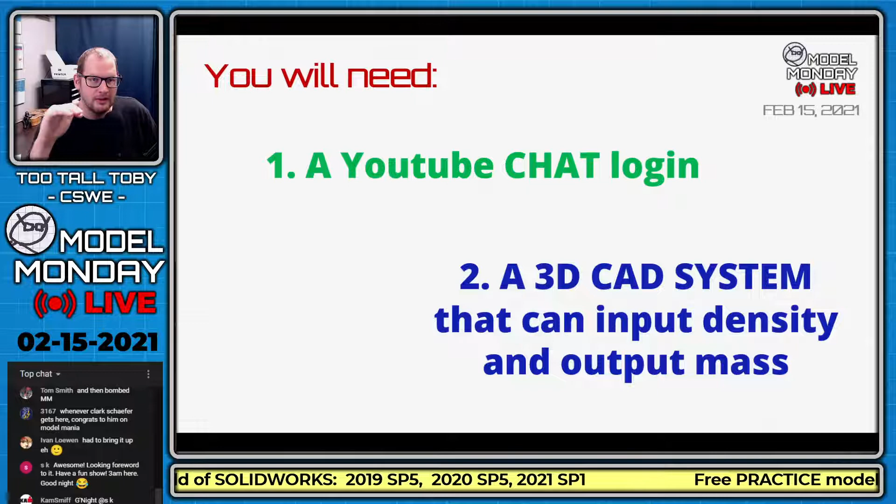Now, there's been a number of people asking about X-Design, Dassault Systems 3D Experience X-Design. Can I use X-Design for this? What I'm going to do to help with that is make a change on the next episode, where I'll change the materials to ones that are in X-Design out of the box. I'll make sure everybody has a proper heads up so you can all adjust your materials to suit. Just a little heads up, look forward to that for next episode. I'm going to change the material attributes, the densities, so they match up with some of the ones in X-Design, because it can be a little tricky to change out the materials in X-Design. I've had a number of people asking if they can compete using X-Design.

Absolutely. You can compete in any system where you can customize the density of your material and output mass. So anything you got, whatever you have. I have SolidWorks, I love SolidWorks, that's my jam. But if you've got something else, that's fine. I want to see who's fastest.

The rules of this tournament and the qualifiers are simple. Number 1, this is meant to be fun and good-spirited. There's not a huge prize or anything like that, it's just meant to be fun and good-spirited. Number 2, I will and have made a mistake on some of the prints, and I'm sure I'll make one again in the future. When that happens, we're just going to work through it together. If you're the type of person who gets really bent out of shape when that happens, it's probably best if you just hang back and watch. But if you're good with this, if this is your type of tournament, your type of challenge, then those are the only 2 rules, and you're in the right place. You're going to get along just great with everybody else in here.

Alnis asks a great question in the chat: does X-Design have custom materials? The answer is yes, 3D Experience is a fully connected system. All the apps are always talking to each other, and you can create your custom materials in a different app and then use them throughout your 3D Experience. So if you're doing simulation, X-Design, X-Shape, whatever you're doing, you can pull from that one single unified materials library. It's not really clearly taught in the X-Design training, so I figured it'd be better to make it a little easier for people, just because it's such a new program, if they want to use it.

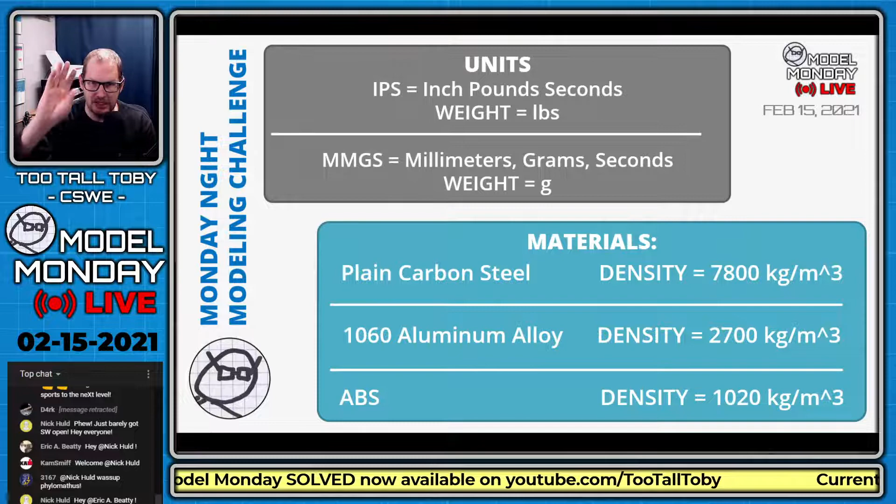For all those of you who have been here before, these are the same materials we've been using all year. No change yet. That change is coming on the next episode. Shaking things up here in Season 3. All right guys, here we go.

First challenge is ready to appear. This one is called 21-02-04 Lifter. I'm just going to flip over to full screen here so that everybody can see it in 3, 2, 1. Take a look here.

This is the lifter. This is something that you might find bolted to a piece of maybe angle iron or some type of iron that's got like a 30-degree angle coming off of it.

So I hope you guys have a chance to see this. Now if you're here for the first time, the challenge is now live. First person to get this answer correct in the chat wins. Probably the best strategy is to take a screenshot of this, a screen grab, using snipping tool or Snagit or whatever your screen grab software is. Take a screen grab of this and put it on a second monitor so you can design on one monitor and keep watching on the other, because I'm not going to leave this up on the screen.

So let's see here. Christian Tello already in with an answer: 124.6. Wow, that's amazing. Christian, that was so fast.

Unfortunately, you're a little bit outside of spec. That's not the correct answer. Maybe you want to check your material densities. But that was a great attempt there, very nicely done. And welcome, first time I've seen you here in the chat, so welcome.

Nicely done. I'm going to leave this up here for about 5 more seconds, and once this is gone, it'll just be up to you. So just make sure you've got a screen grab of this. I'm just going to take a quick listen to the audio here.

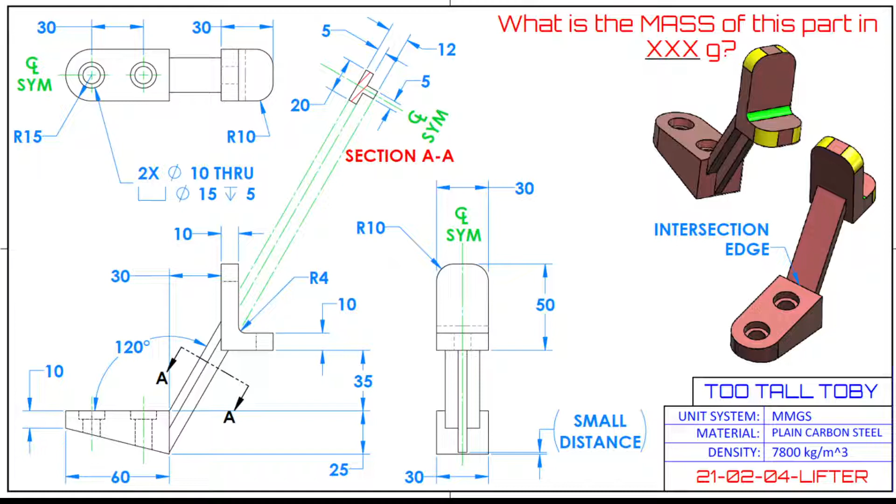Christian says, no, I'm just spitballing. Hey man, I love it. It's funny that you're doing that because I'm gonna flip back, I'm gonna take us off the screen now.

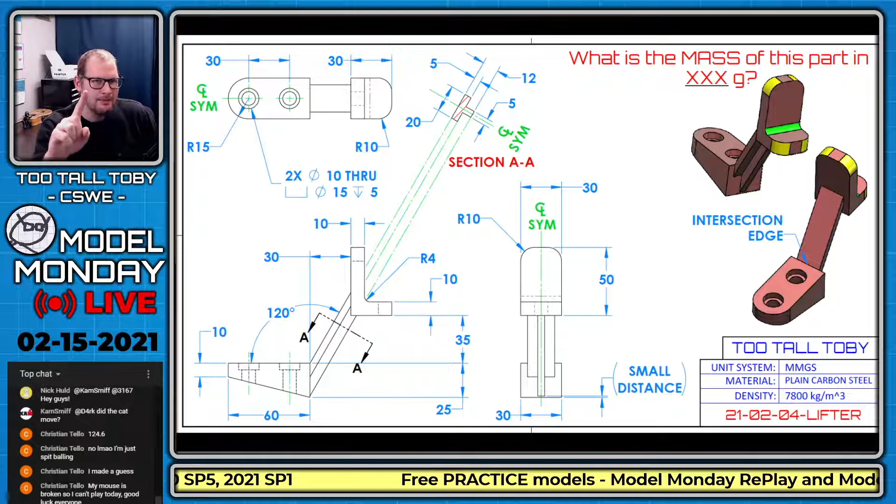In the tournaments that we've had so far, Christian, we have had a rule where you can answer incorrectly once. You get 1 mulligan per challenge. In the tournaments, we have people actually competing head to head, sharing their screens. So let's say, for example, Kam was going up against Zachary, and Zachary answered twice incorrectly. The first time he answers incorrectly, I'll let him know. Second time, that's it, he can't answer anymore, and it's up to Kam to come up with the correct answer.

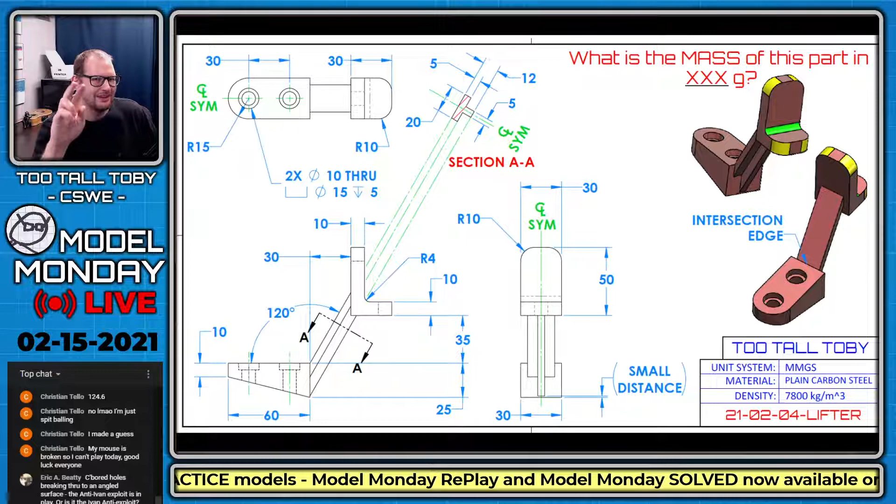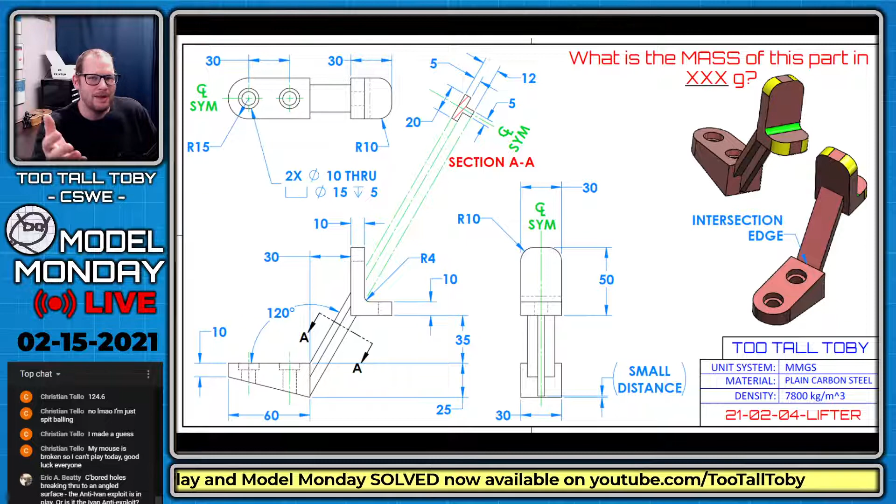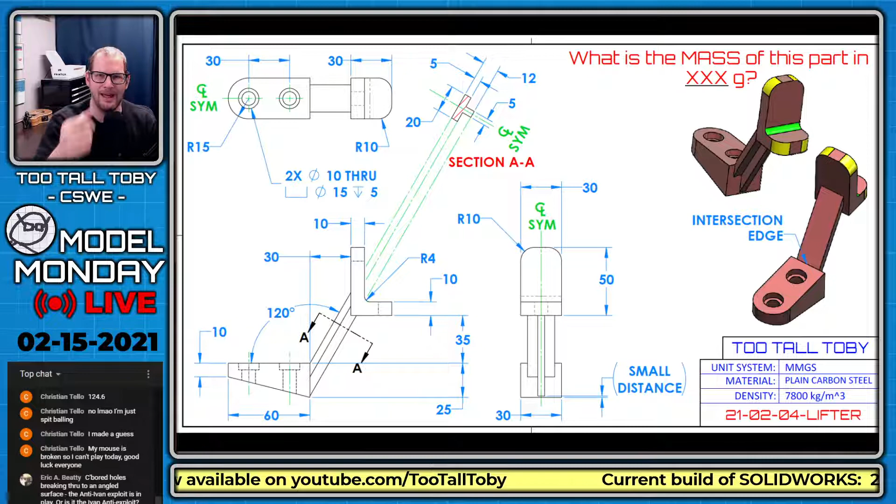For example, an example of game theory strategy, game theory optimal, might be if the part seems like it's got a lot of trickery to it, maybe just hang back and let your opponent tap out, as it were. I'm not sure I want to go quite down that far. This isn't meant to be that type of strategy, we're not trying to go that deep into it. It's meant to be good-spirited, and that might take away from that good-spirited aspect, but just kind of food for thought.

I appreciate the enthusiasm there, Christian. Christian also says his mouse is broken, so he can't play today. He's just kind of doing it by eye, eyeballing it up and saying, you know what, I think based on what I think the volume of this part is, it's probably 124.6.

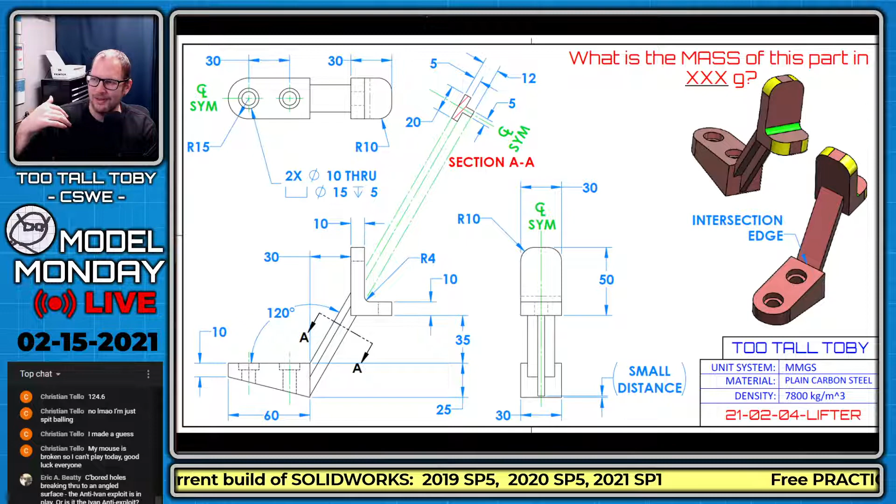Excellent guess. Eric calling out the C-bores going through the angled face, the anti-Ivan exploit. That is correct, trying to prevent the Ivan exploit, where you could just kind of drop those holes anywhere. If you guys haven't seen the Ivan exploit, I think it's about time that I make a video straight up on the Ivan exploit, explaining what it is, because we reference it so frequently, and there's probably a lot of people watching who are like, what in the heck are they talking about?

Guys, last week was 3D Experience World. It was a great time, a lot of fun, great catching up with so many of you there, virtually if you will. It was a very interesting conference. We've never done a virtual 3D Experience World, and 3D Experience World used to be called SolidWorks World. Last year, 2020, they changed the name to 3D Experience World.

Our good friend 3167, who's in the chat, was actually brought up on the virtual stage during the Reddit special event, and he had both myself and my wife, and I'm sure a lot of people, cracking up. You were a wonderful guest on the show, 3167. It was really funny, and he gave a shout out to TooTallToby as well, which I thought was pretty cool. And 3167 also recently took and passed his CSWP, I think maybe on certification day last week. So you guys, if you're in the chat, make sure you give 3167 a GG for taking and passing his CSWP, Certified SolidWorks Professional Exam. That is awesome, and congratulations to you, 3167. I think that's awesome, that's a tough exam, and I think it's great that you're able to get through it.

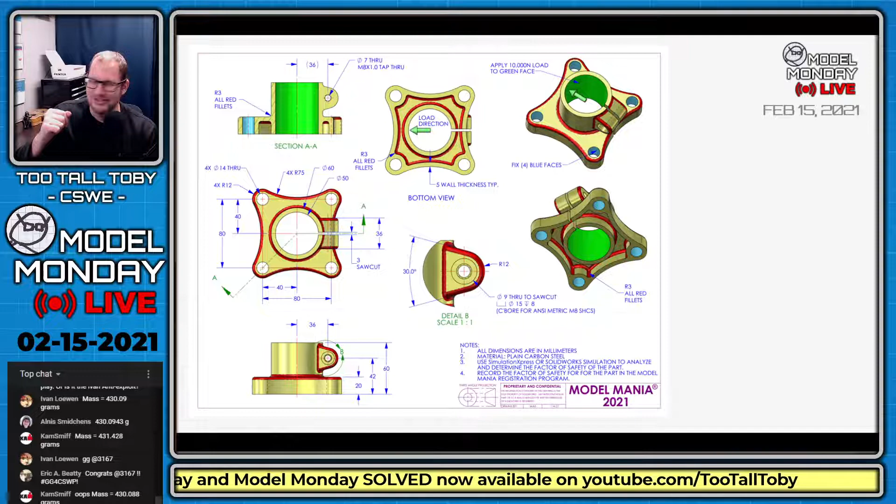One of the things you can do when you go to 3D Experience World or SolidWorks World is participate in a competition called Model Mania, which is very similar to what we're doing here tonight. Clearly I got a lot of influence from Model Mania for the Model Monday live challenges. What happens with Model Mania is you show up at a booth, a physical booth, and they give you a drawing and say go build this drawing. Then you say okay, I'm done, and they give you a Rev 2, a change to the model. You have to make that change, and then they say now run a simulation study on it, and they give you a simulation scenario. Last week the challenge was done virtually, so it was very similar to what we do here in Model Monday Live. They gave you this pretty tricky part, not an easy part. It probably wasn't the hardest model I've ever seen in Model Mania, but it was not easy either. When you're doing these competitions, man, you just get so jittery trying to go through and complete these challenges.

I just want to give a huge shout out, a huge congratulations to everybody who participated. There was a SolidWorks challenge, a resellers championship, so the users and resellers get split up in the SolidWorks challenge. There was a 3D experience challenge where people voted on which one was their favorite, again split up into users and resellers. Then there was a student challenge as well, which was a little bit more like a speed run.

I just want to call your attention here to number 1 and number 2, Tim Z and Clark Schaefer, two guys who are regulars on TooTallToby on Model Monday Live. Congratulations to both of you. Clark has been with us pretty much all year, since we started last year, and he's been crushing it. I think Clark really came onto the scene around the time we started our second tournament, so around the December tournament, maybe 6 months ago. And man, he was on top of the leaderboard on that tournament, he got into that tournament. Clark, congratulations, man, that's so awesome, taking down second. And then Tim Z, I think maybe 2-3 months ago, he started showing up for Model Monday Live, and he ends up taking down first. I just think it's so awesome, huge shout-out to you guys, great job getting up there. You're motivating all of us to make sure we up our game a little bit more for next year.

Also in the Student Challenge, huge shout out to Juss, who is regularly in the comments on Model Monday Replay. Probably Model Monday Live is not a good time in his time zone, but he's there in Model Monday Replay, always lighting up the comments board.

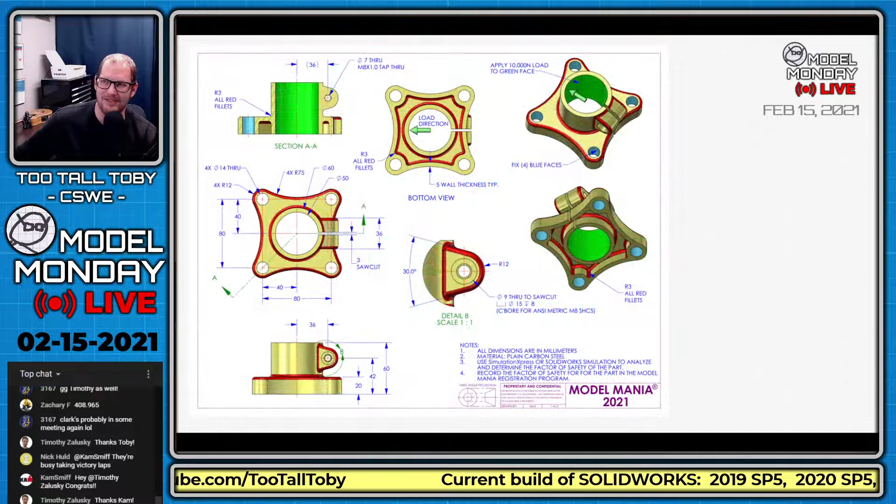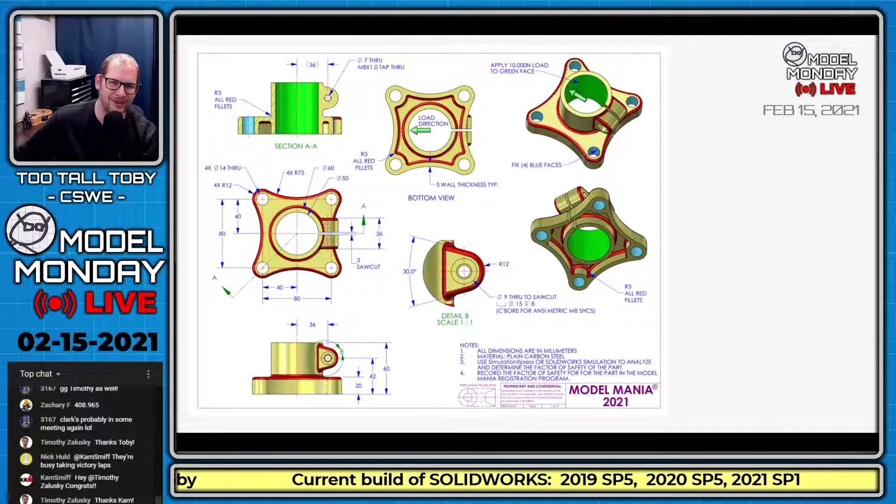So congratulations to these guys, regulars on TooTallToby, and welcome. Also, congratulations to anybody really who finished it. This was a pretty tricky model, and I got a little surprise for you guys. On that day, I know some of you know, because as soon as it was over, I was right in there with you guys, like, what happened?

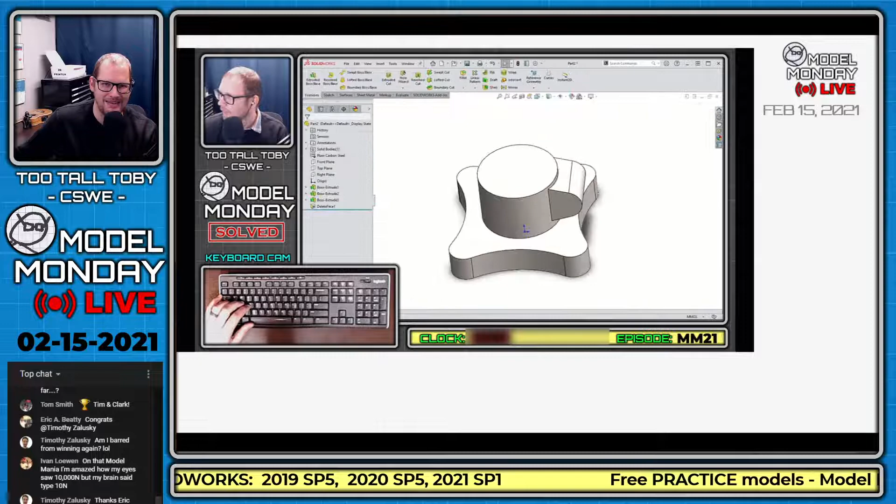I actually took it and videoed it. So this week, you guys are going to see a very special episode of Model Monday Solved, where I'm going to show you guys kind of what I was going through, how long it took me, what types of mistakes I made along the way, what types of challenges I ran into, maybe even a little bit of demystifying what happened with Ivan.

I think I figured out what happened to you, Ivan, or possibly figured out what happened to you with that order of magnitude mistake there on the amount of force that was applied. So that's a video that I'm almost done editing. I'm excited to share it with you guys, and I hope you guys will like seeing the way that I think through it. It was far from perfect, but I definitely think there were some good lessons in there.

And overall, it's just kind of cool - it was cool for me to look back and see that feeling that we all get of like, oh God, here we go, this is it. We all end up getting that kind of jittery feeling.

So I see a lot of answers coming in. I just want to say one more thing about 3D Experience World, and then I have a question for all of you as well. The one last thing I want to say is that you can go to 3dexperienceworld.com still, and you can access the catalog of the recordings. If you go there, log in with the same registration you used for the main event, you can go into the section called Session Catalog.

And you can sort by delivery method on demand - down at the bottom where it says filters, delivery method on demand. There's just so much good content in here that I didn't get to watch last week that I've been going over and watching. I literally just watched another one today - Tank's video called I Am Lazy, Tips for Making SolidWorks Work for You. There's just so much good content in here that you can still go through and benefit from, so don't overlook this resource.

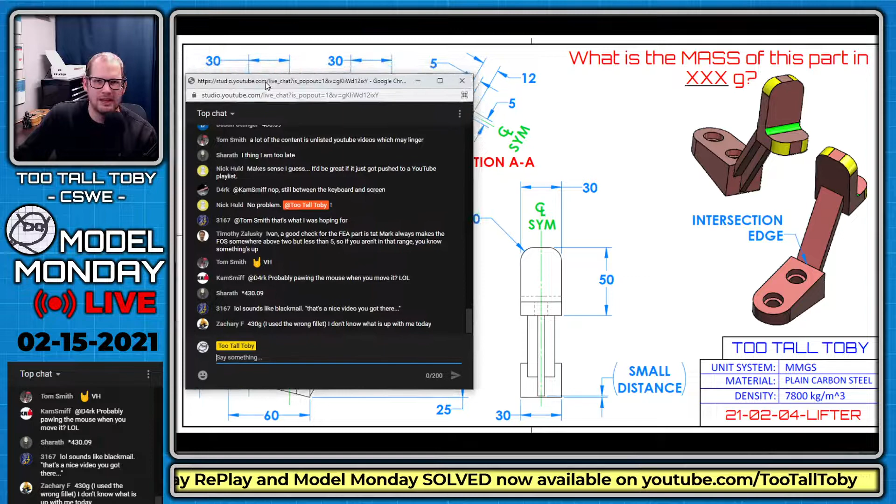And with that, I think I've given everybody enough time to answer this question here. This question was, what is the mass of this part in grams? Let's move the chat over here. Let's take a look at the chat, see if anybody was able to get an answer, and if anybody was able to get the correct answer as well.

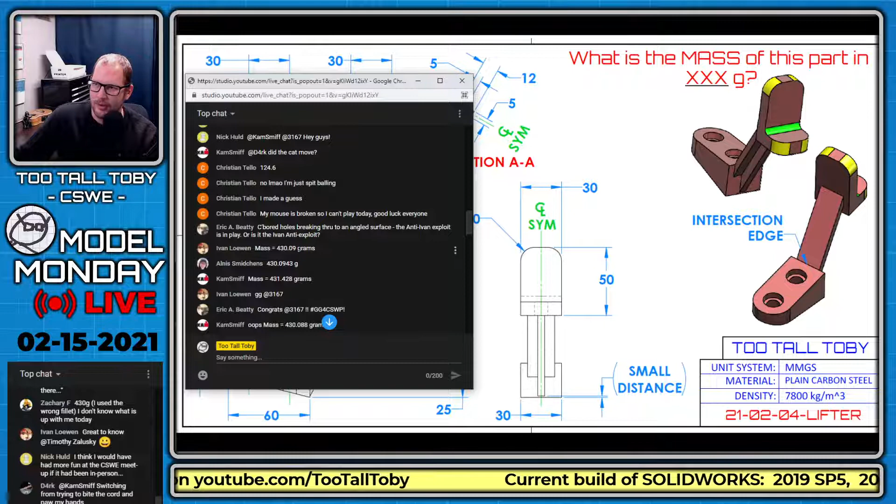So we got Christian Tello coming in here, first place, very first person to come in with an answer. It was not correct, but he still gets an honorable mention for having the first answer. Nice job, Christian. We got Ivan coming in with 430.09, so we're looking for this in XXX grams, basically plus or minus 0.049, or plus or minus 0.49 grams, to the nearest gram. So we're going to call that 430 for Ivan. Alnis came in right behind him also with 430. Kam coming in with 431.4, so Kam coming in a little bit higher.

We're going to see which one of those was correct. Let's see here, and we got Kam up correcting down to 430. So it looks like 430 is getting the consensus. Philo Mathis coming in with 430 as well, nicely done. Tom Smith coming in with 430. Chris Loretta, what's up Chris? How you been man, great to see you in here. Coming in with 430, nicely done.

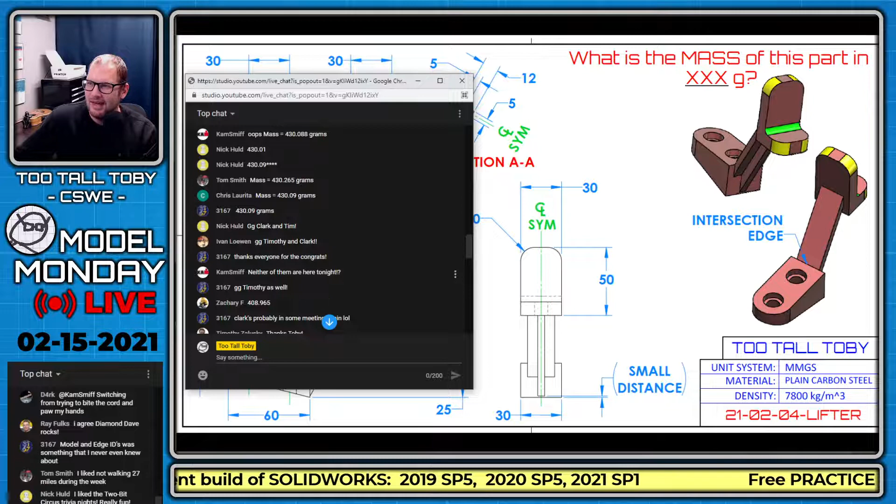We got Zachary F coming in a little bit low, 408. But I don't know, maybe he's right as well, you never know, don't go with the crowd, you never know who's going to be right. D4RK coming in with 429.29, very, very close to what everybody else was coming up with. Zachary F coming up to 425 now, adding the second rib. Sharath coming in with 438, we got some answers all over the place here.

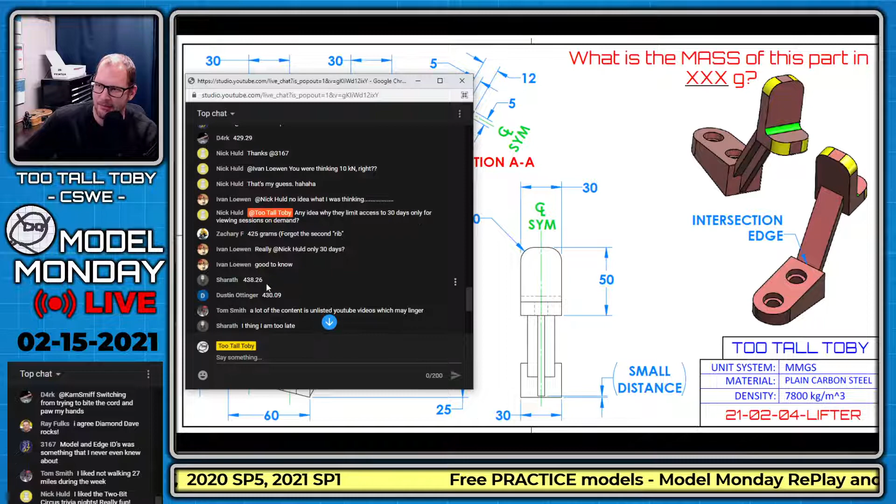Dustin, what's up, first time I think I've seen you in here. 430, nicely done. Okay, and let's see here, Sharath coming in with 430.09, so that looks like a correction from earlier, coming back into 430 with everybody else. Zachary coming in with 430 now, he says, don't know what's up with me today.

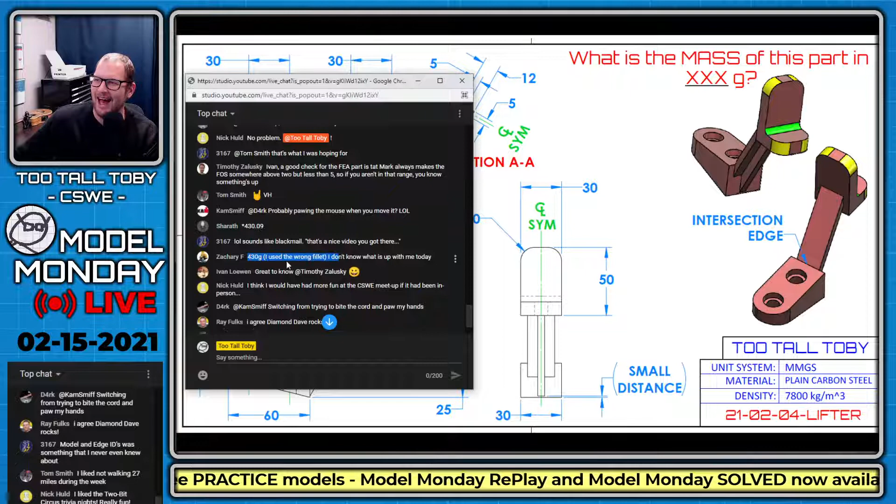Hey, you guys may try as you want here, but we're only looking for the first answer. And it looks like that first answer is 430. Let's see if that is the correct answer. So the correct answer is 430.

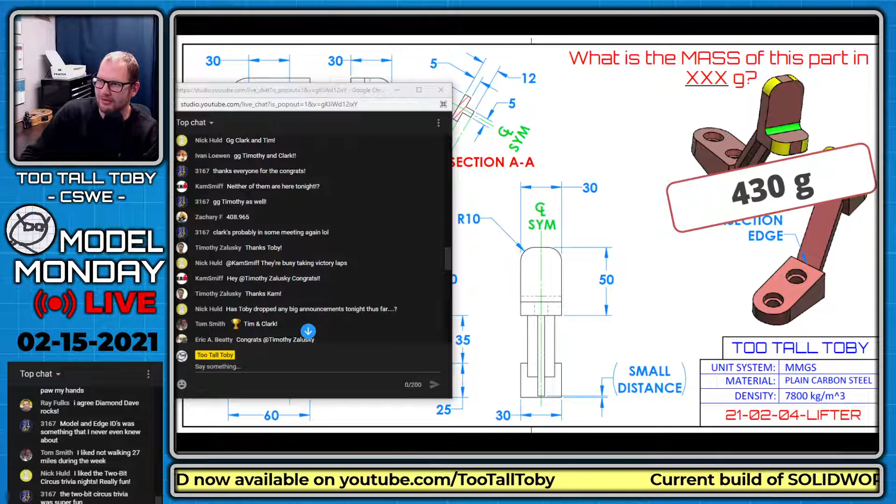That is the correct answer, so it looks like Ivan is going to win that first session. We're going to change this here to Ivan. I think I might have spelled your last name wrong, Ivan - I added an extra letter there, sorry. Actually I spelled it way wrong. Sorry, bro. All right, fixed. Ivan is USA, and 1 point for Ivan.

I know you guys can't see what I'm working on over here, but don't worry, I'll show you in just a moment. If you guys go to my website, TooTallToby.com, and click on the link in the upper corner, you'll see there is a leaderboard, and that leaderboard is now being led by none other than former champion of this very tournament, Ivan the Reasonable. Nice job, Ivan, congratulations. You are the first one on the board on the fastest updating leaderboard in educational esports, guaranteed.

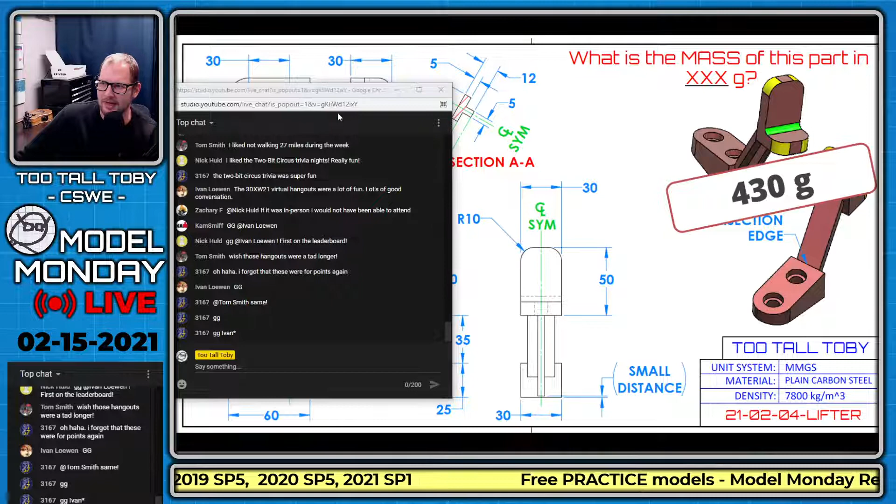Very nicely done to everyone who was able to come up with the correct answer. These are for points, that is correct. I'll come back to take a review of some of the answers to those questions in just a moment, but I want to make sure everybody has time for the next challenge.

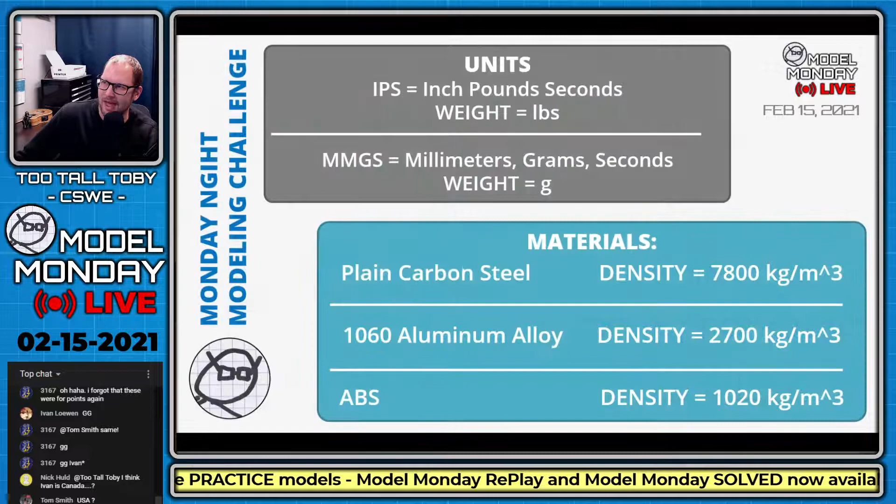Now, the past couple weeks you guys have been asking me about sheet metal. We're going to be doing live challenges tonight, the points are live, you can win all three. And guess what, we're going to be doing another sheet metal challenge tonight. This model is sheet metal - that doesn't mean you necessarily have to use SolidWorks sheet metal to do this model, but if you do, it'll probably be a lot easier and faster. So here we go, everybody, this one is called Hold Bracket. If you don't have sheet metal or SolidWorks, you could absolutely do this model without sheet metal features, but if you do have it, it's going to go a lot faster. Here we go, 3, 2, 1, go.

You'll notice here I'm looking for the mass of this part in XXX grams, and this model has a default wall thickness of 5 millimeters and a default bend radius of 5 millimeters. As always, you're going to be best served to take a screen capture of this - it should help you continue modeling while we move on with our presentation.

I'm going to take a sip of my lemon ginger kombucha. It's delicious - it's probably going to have me up all night, but that's okay.

Just doing a quick check of the audio. Looks like Clark is now in the chat - what's up, Clark? Welcome, welcome. You are here in time for the second one, it is a sheet metal challenge. And congratulations, we gave you a big shout out earlier, congratulations on your victory over almost every other person in Model Mania this year. Very nicely done.

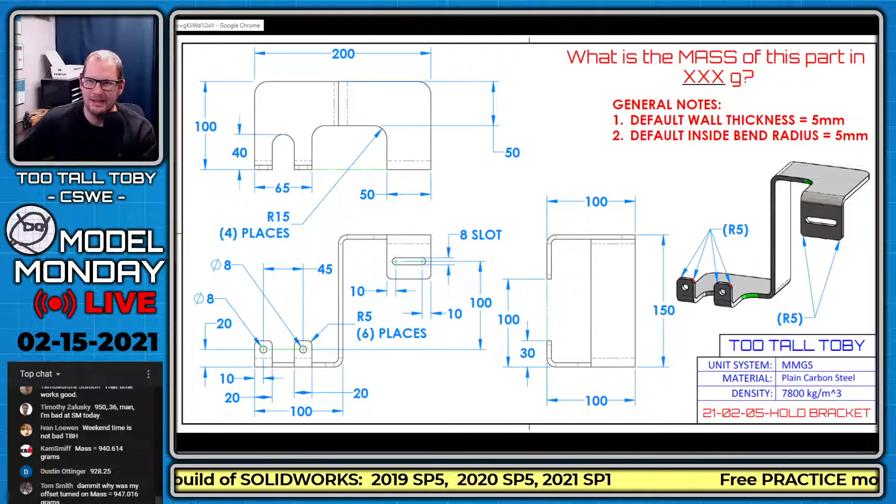So it's good practice, and I try to give you everything you need. So let's see if we did it, let's see if I gave you everything you needed, or see if I lost anybody on this one.

Let's see here. We are... all right, here we go. I think we're getting to this one here. Here we go. All right. I want in on the joke as well. Okay, all right.

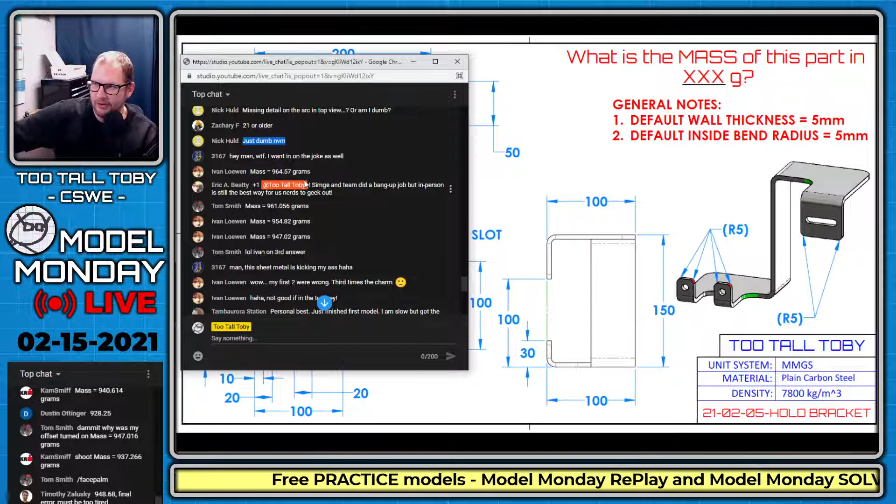964.57 from Ivan for the first answer. And Ivan was there in the first one as well. So if that's correct, he might actually end up getting 2 points on the very first night of Season 3. That would be amazing, huh? All right, let's keep moving on here.

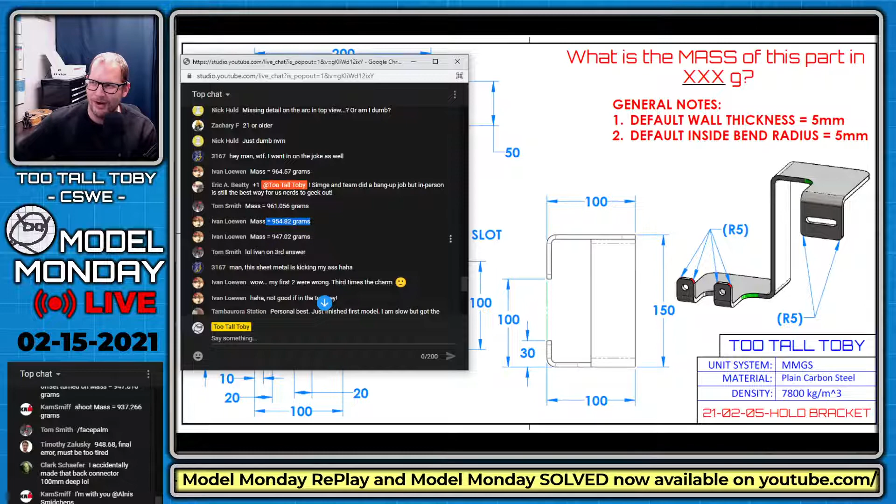So Tom Smith, 961 — oh, a different answer from Tom Smith there. And then Ivan coming back in with 954, and then Ivan coming in with 947. So I think he's just going to keep rolling down the entire catalog of all the possible weights. I'm curious, Ivan, what happened there? What did you miss on the first 2, but then locked in on the third one? That's interesting. Okay, so we got Tom Smith here at 961, we got Ivan at 947.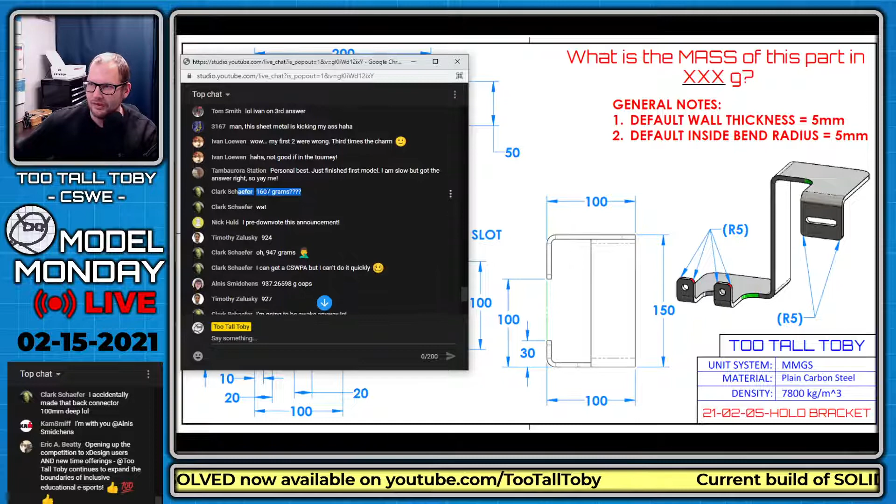Clark coming in at 1607. Let's see here, Tambaurora Station says personal best, just finished the first model, I'm slow but got the answer right. Nice job, Tambaurora Station, GG on that first model. What matters is that you get it right, man. It doesn't matter if you finish it in 10 minutes, 20 minutes, or 30 minutes, as long as you get it right, that's what really matters.

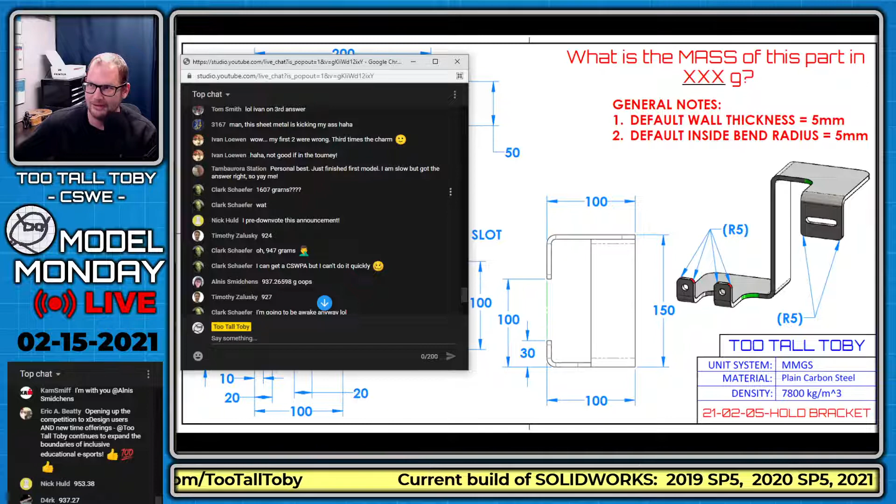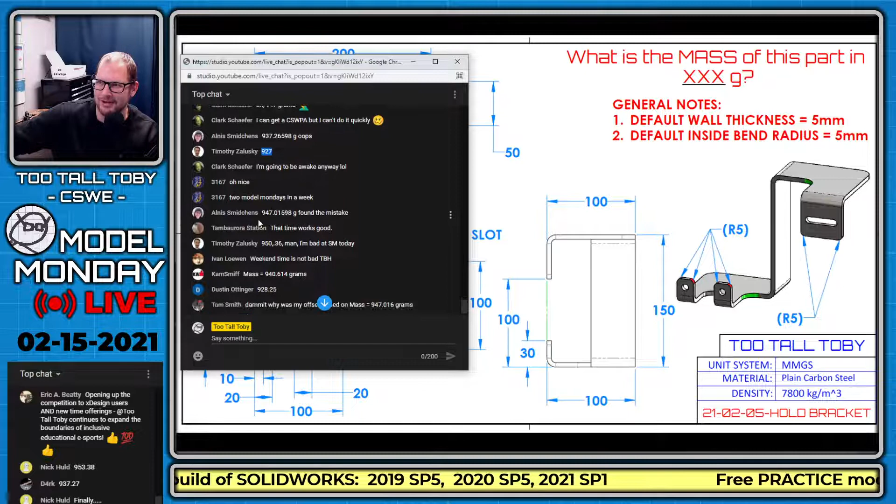Let's see here, Clark says 1607. Tim Z coming in with 924. Let's see here, Clark adjusting to 947, which was Ivan's third answer as well. So we finally have 2 consistent answers, I think, for the first time. Alnis coming in with 937. Tim Z coming in with 927. So everybody's still kind of all over the map here. Alnis coming in there with 947 then.

Says he found a mistake. Let's see here, Tim Z, 950. Man, I'm bad at sheet metal today. Yet another answer. Kam coming in with 940. Man, everybody is all over the place on this thing. Dustin coming in with 928. Shout out to Dustin, how you doing? Welcome back to round 2.

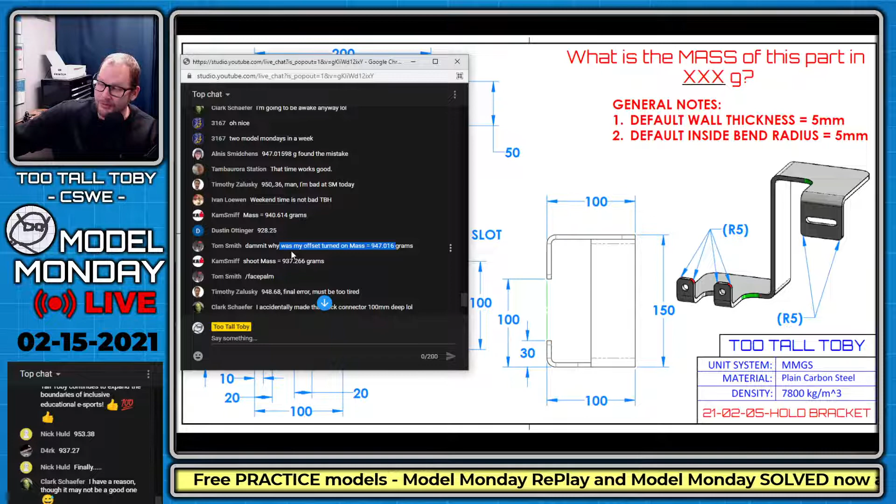Tom Smith coming in with 947, says my offset turned on. Damn it, why was my offset turned on? Tom, you know what's funny, that was happening to me too. It's really interesting, I don't know if there's something with the geometry of this model or what, but offset was defaulting on, and that's the first time that's ever really happened to me. Wouldn't it be weird if there's some combination of steps that I did when I was auditing this that you also did that caused that to turn on?

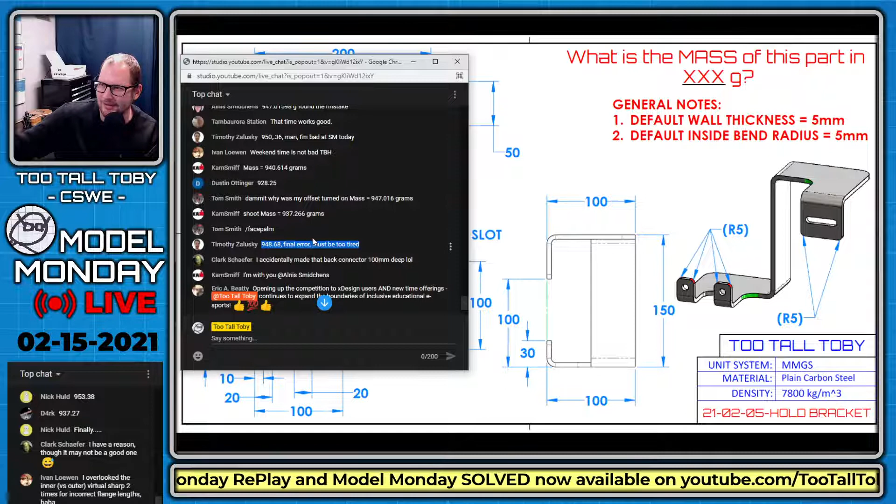It's so weird. Kam coming in here, 937. Tim Z, 948, final error, must be too tired. Still a little different, a lot of different answers on this one. This is a good model, huh?

Okay, let's see here. All right. Eric, give me a shout out. Hey man, I'm doing what I can here. Appreciate the shout out, Eric.

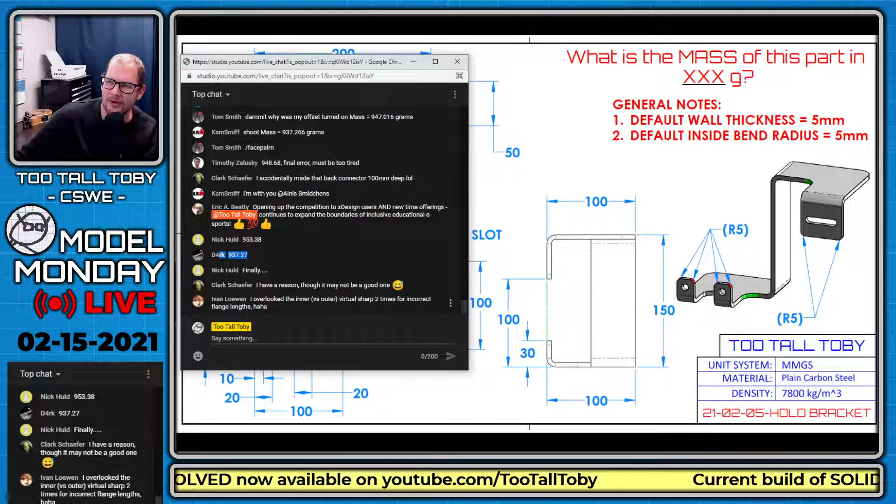Let's see here. Nick Huld saying 953. Dark coming in here, 937. And Ivan says, overlook the inner versus outer virtual sharp 2 times for incorrect flange lengths. Let's see what the correct answer is here. Guys, we got a lot of different answers. So this is a good one.

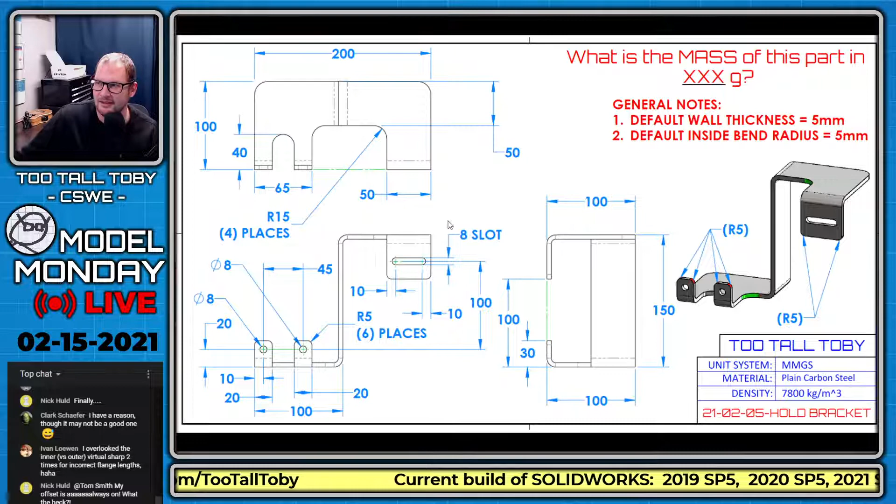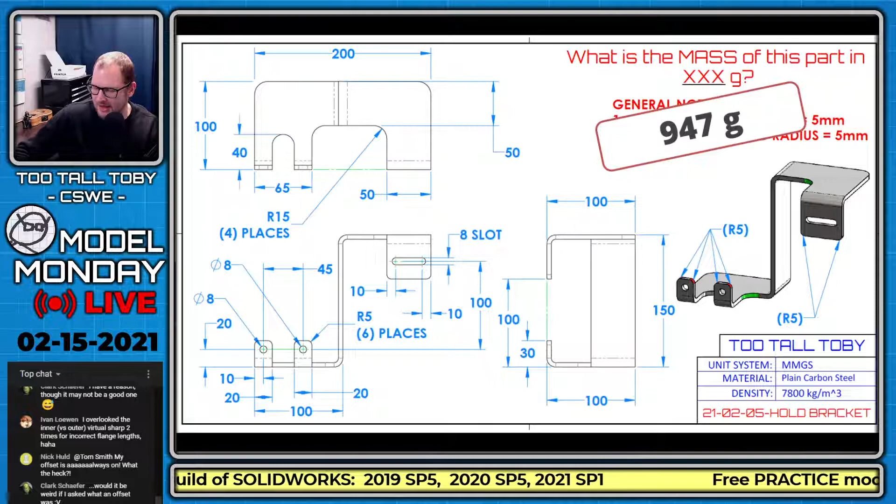Correct answer is 947. Ivan, third time's a charm. Loewen comes in and gets it with 947. Let me update the fastest updating leaderboard in educational esports. Come over here. If you guys go to the TooTallToby website, you go to Model Monday Live, what you will find is that Ivan is now listed here at the top of the leaderboard with 2 points. Congratulations, Ivan. Very nicely done.

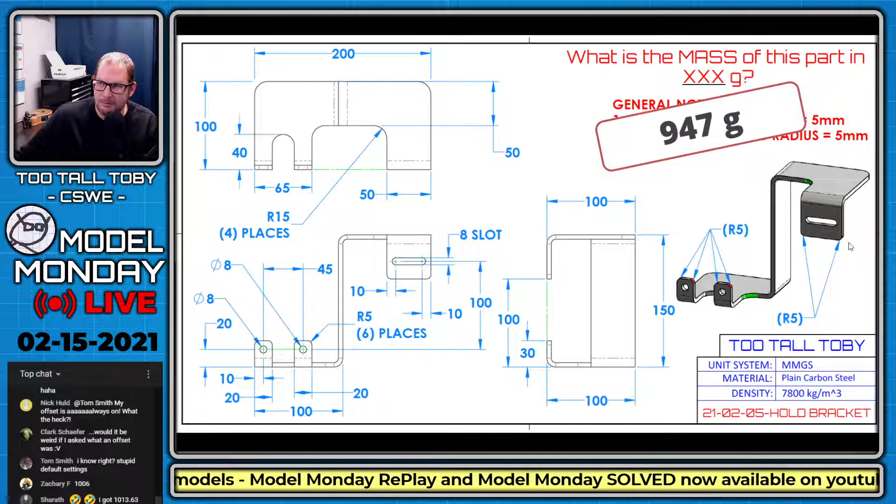947 was the correct answer, and that model had a little bit of trickiness to it for sure. I think with sheet metal, a lot of times the hardest thing to learn how to do consistently is something that does indeed come up all the time, which is stuff like this. This is why I really like this model. This front face of the model here, it's going to be bolted to something. And a lot of times when you're doing some kind of a holding bracket, 2 different faces on the sheet metal have to be coplanar in order for it to fit into place, to fit onto that mating component. So it's definitely a great exercise to go through to learn how to do that, to learn how to do it consistently, and to kind of learn some best practices and best ways to do it.

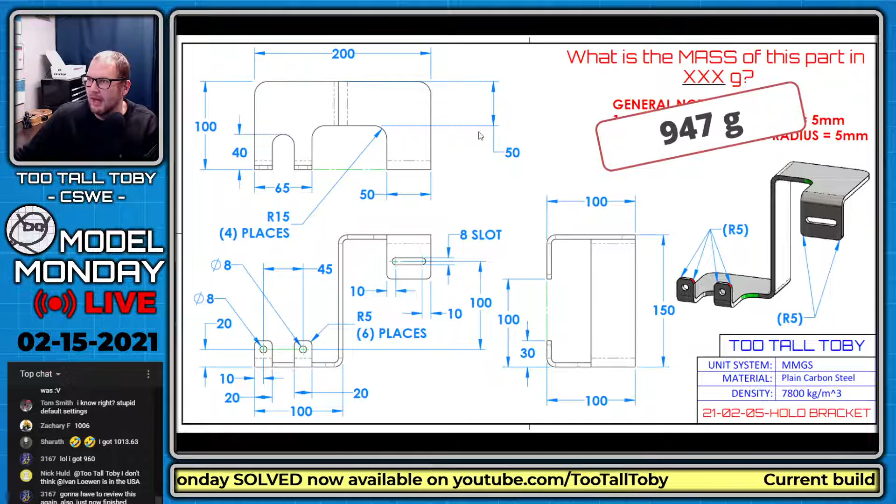It's not necessarily about doing any kind of a shortcut. Even if you manually created a tab that just came straight over in this direction—I tried to zoom in there, it didn't work though—if you created a tab that just manually came straight over in one direction, and then came straight down in this direction, using the base flange tab command, and then bent straight down, just learning the idea of the flange position when you're creating edge flanges is going to be really valuable.

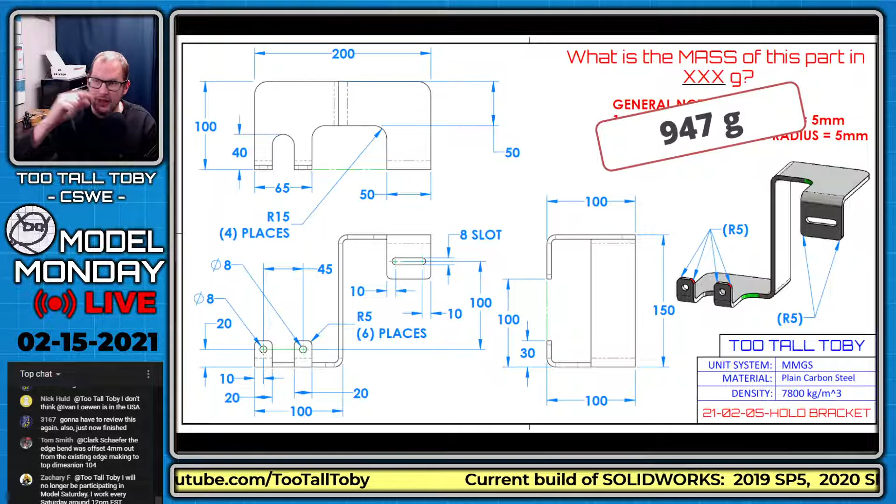And this is definitely the stuff that you will see in the real world when you're doing sheet metal. So glad that we had a chance to work this one in. This is a cool model.

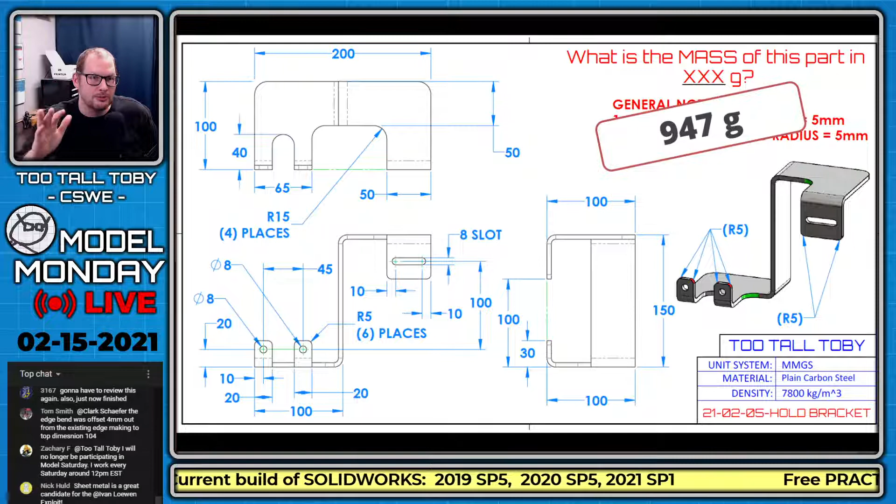A lot of times, especially with the sheet metal stuff, because it's kind of hard to find mechanical examples in some of my old books, which is where I pull a lot of my influence from, with the sheet metal examples a lot of times I'll just literally Google sheet metal bracket, and then I'll look in the image search, and I'll just sit there and scroll through, and then I'm like, oh, that one, and then that gives me kind of like a starting point, and then a few minutes later we end up with something like this.

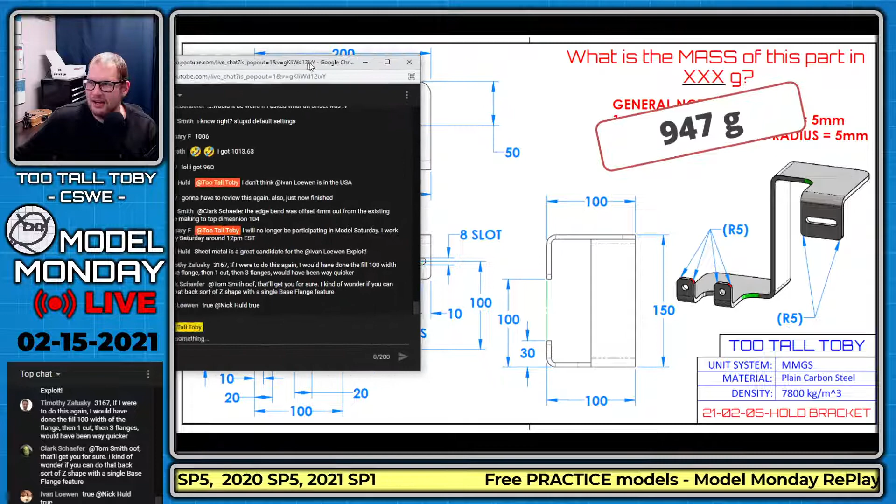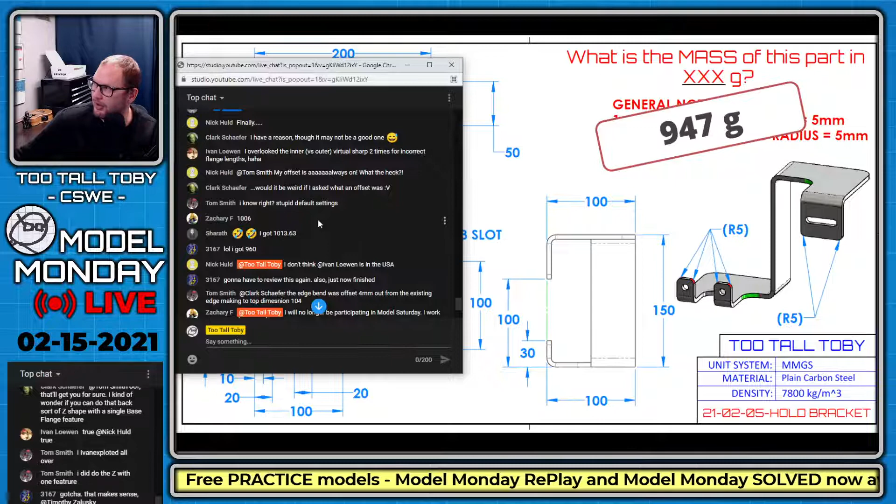So let's see here. I'm just going to flip over to the chat here, just make sure I'm not missing anything. Nick says, Toby, I don't think Ivan is in the USA. Yeah, that's a good point. Ivan, are you in? I thought. Well, Ivan, you let me know if you're not in the USA. If you're in Canada, I will update it. I think I just happen to have you. I guess I actually did change it, huh? It did say UK, and then I changed it to USA. At least I got closer. But that's good. Thanks, Nick. Appreciate the shout out or the heads up on that.

Let's see here. All right, gonna have to review this again. Also, just now finished, nice job, 3167. Sheet metal is a little tricky, for sure. Okay.

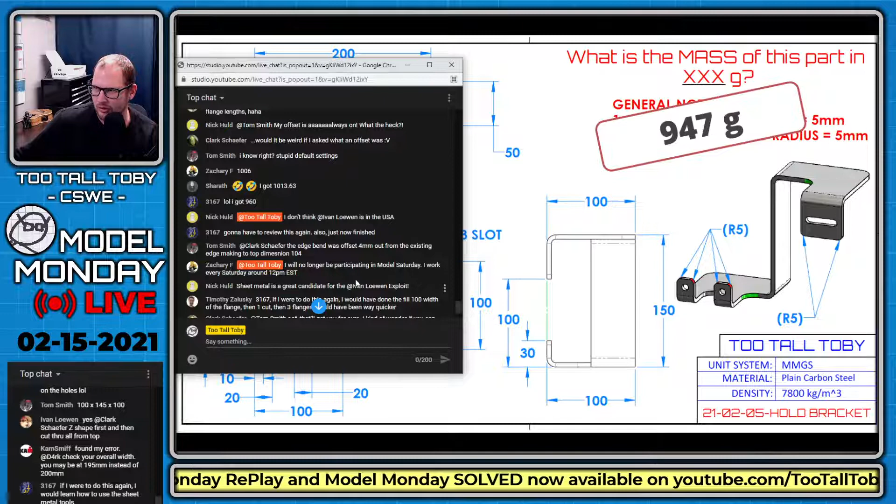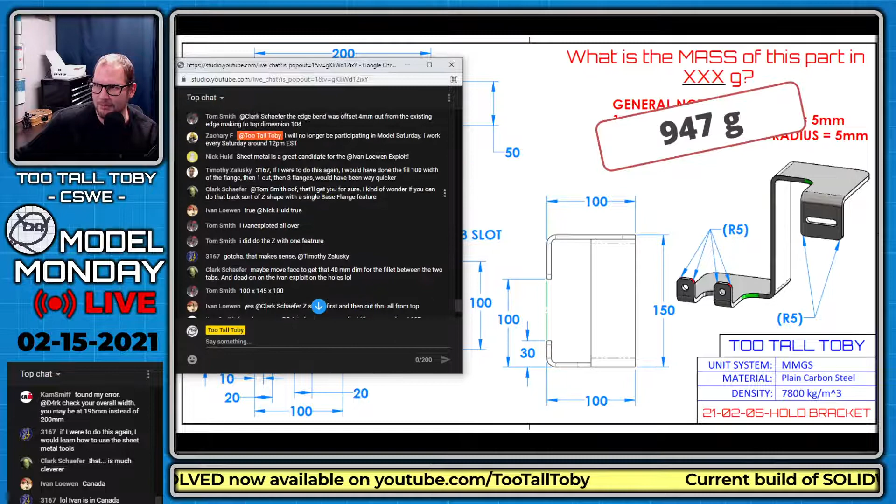Zach says he works every Saturday around 12 East Coast. That stinks. Well, it depends on where you are, Zach. Depending on where you are, it might be early enough for you. But if it's too late, I am a little bummed. I'll miss you, bro. Okay, let's see here. But I do appreciate the heads up, so I'll know where you are. And you can always still do the Model Monday replays if I can start getting them out on time. That's for sure.

And then the other thing is, of course, you can watch the replays. And if you're just trying to compete just for fun, you can just compete against the other people.

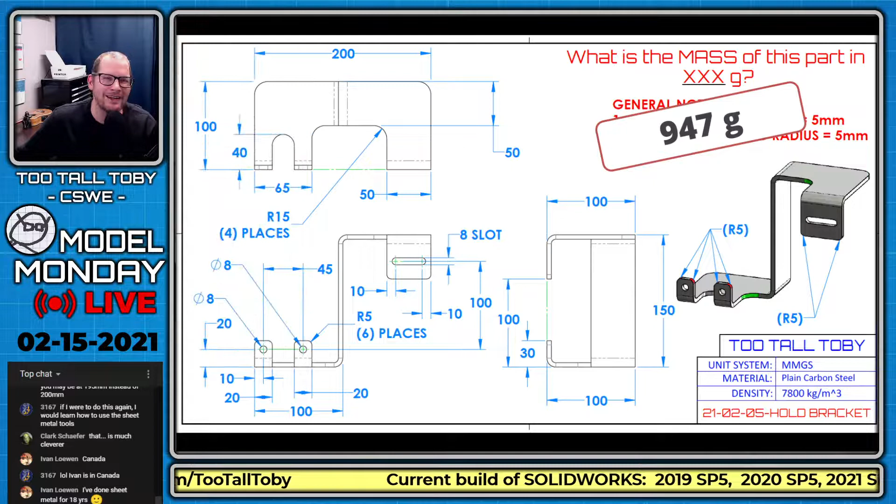All right, cool. Ivan is in Canada, done sheet metal for 18 years. Good, well, it's right in your wheelhouse. I'm going to do the entire tournament in sheet metal this time too, then, just to troll everybody else, Ivan.

All right, here we go. Model Monday Live, final challenge of the night. Let's see here, there are 3 challenges tonight. The points are live, you can win all 3.

Ivan might become just the 3rd person in history to clean sweep. It started with Clark Schaefer, he was the first person to clean sweep, to win all 3 in one night. Tom Smith did it 2 weeks ago. Ivan's trying to get himself on that leaderboard as well. Let's see if he can do it.

Once again, we're going to be using the same materials we've been using all year. Here we go guys, this one is going to be called Bracket. It's a very bland, generic name here on this one. Here we go.

Let's see here. A question came in from Mike. What's up Mike, welcome to the party bro. Can someone please explain the difference between tangent and virtual sharp? I'd be happy to explain that. No problem, here we go.

3, 2, 1. This one's actually called Wedge, it's not called Bracket. I think I had the old slide for that. This one is actually called Wedge, so 210206 Wedge.

Just taking another sip of my lemon ginger kombucha. It sure is delicious. And I'm going to now update the most rapidly updated leaderboard in educational esports to make sure that we have Ivan shown from the correct location, because this thing is going international.

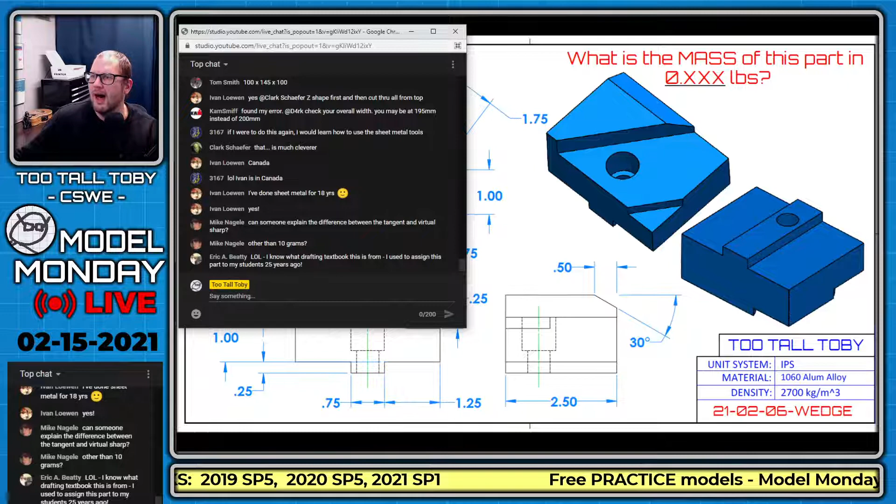So with regards to the question from Mike, Mike's question was, can someone please explain the difference between tangent and virtual sharp? So Mike, I think, I guess in that example what you're asking about is with regards to sheet metal, like when the sheet metal flange position makes that callout. I mean just kind of in general, when you're talking about virtual sharp, what you're talking about is the intersection point between two edges that don't necessarily intersect.

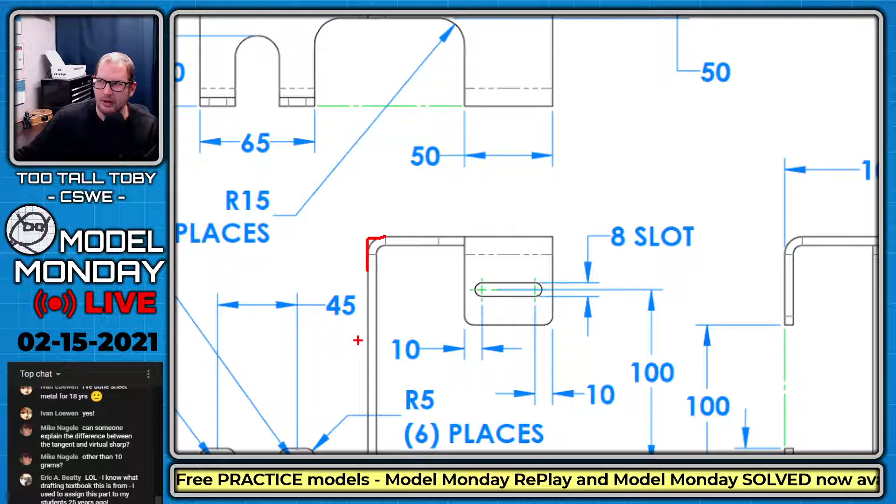So up here in this view, the virtual sharp here at this fillet would be where this edge extends and where this edge extends. And then down here in this view, you can see it's where those two edges extend, where they come together. That would be considered the virtual sharp.

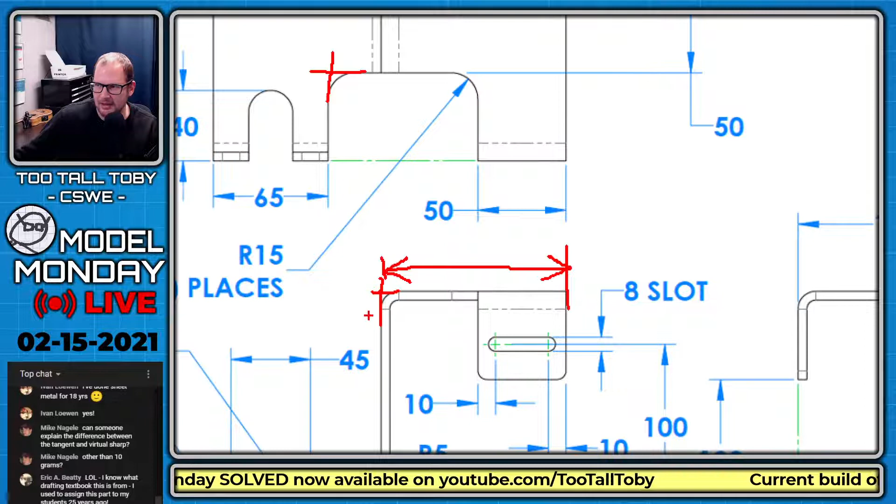So in terms of sheet metal, when you're taking a flange distance and you're measuring a flange distance off of a virtual sharp, if the bend is 90 degrees, then the distance from virtual sharp and the distance from tangent are the same, right? Because the tangency point of a 90-degree bend is the peak, right? So it is collinear to this line here anyway. But when the bend is not at 90 degrees, that's when it starts to become different.

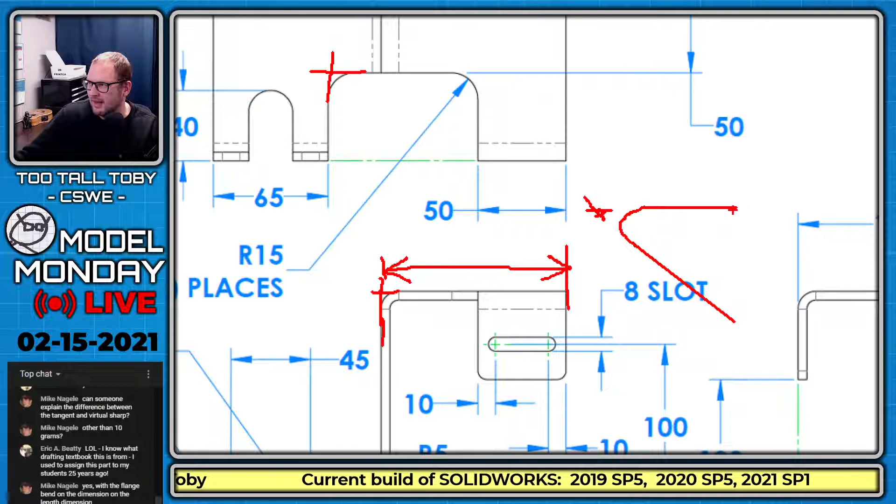So you could imagine, and I'm just hand sketching this here so it's not going to be perfect, but you could imagine that if you had a tangency like this, now the virtual sharp distance is going to be way out here. The intersection of the horizontal edge and this angled edge is going to be way out here. So then if we were to take that distance to the flange, here I'm going to draw the distance using a different color. So if we were to take that distance out to the virtual sharp, it would be this distance.

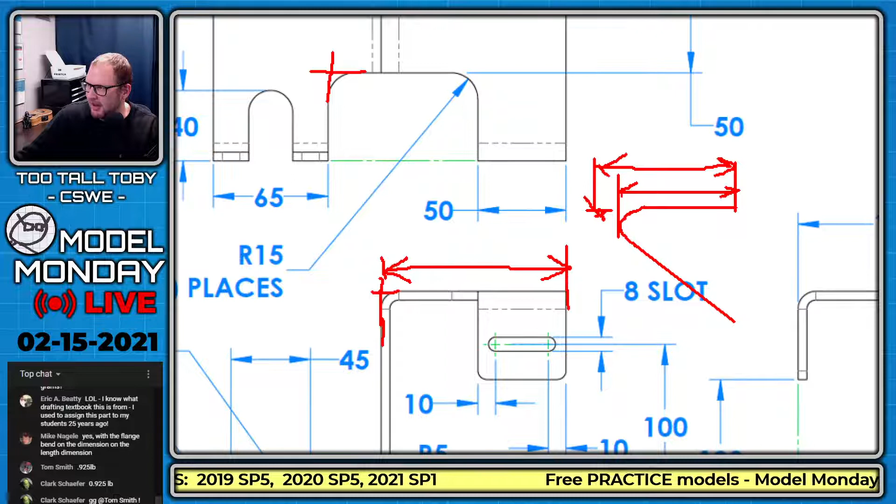But if we were to take that distance to the tangency point, it would just be this distance here. So it only really becomes different when you're dealing with a flange distance dimension. This is in the flange property manager. You can declare that you want the distance to be from a virtual intersection point, or from a point of tangency. That's the only time it makes a difference. When it's 90 degrees, it doesn't make a difference.

All right, I hope you guys enjoyed that drawing. It always looks like I'm drawing with a crayon on a napkin when I draw freehand with a mouse. And frankly, freehand with a pencil. But don't tell anybody about that one.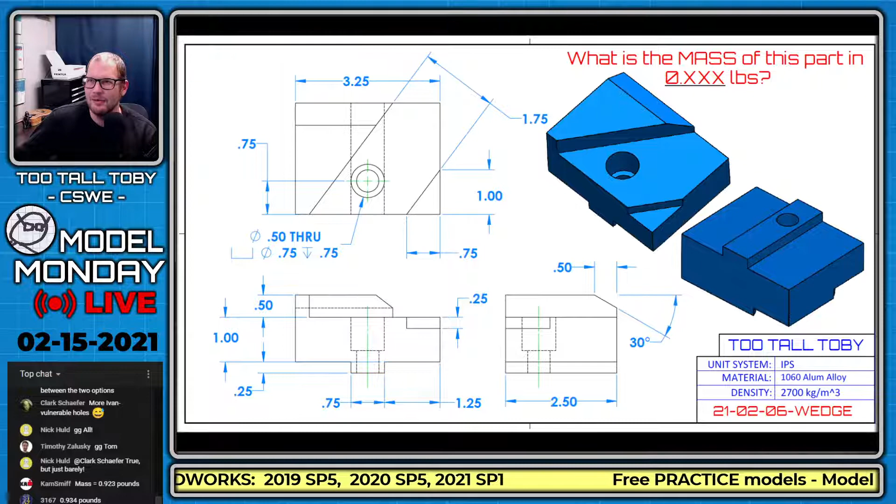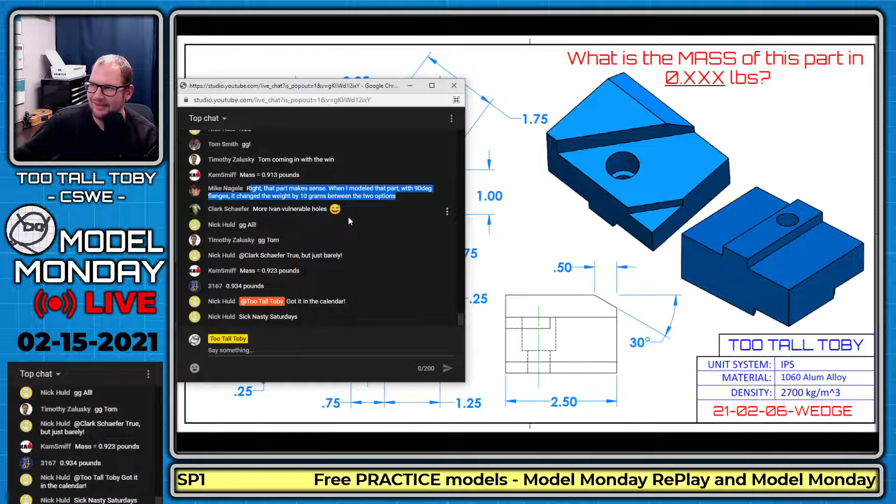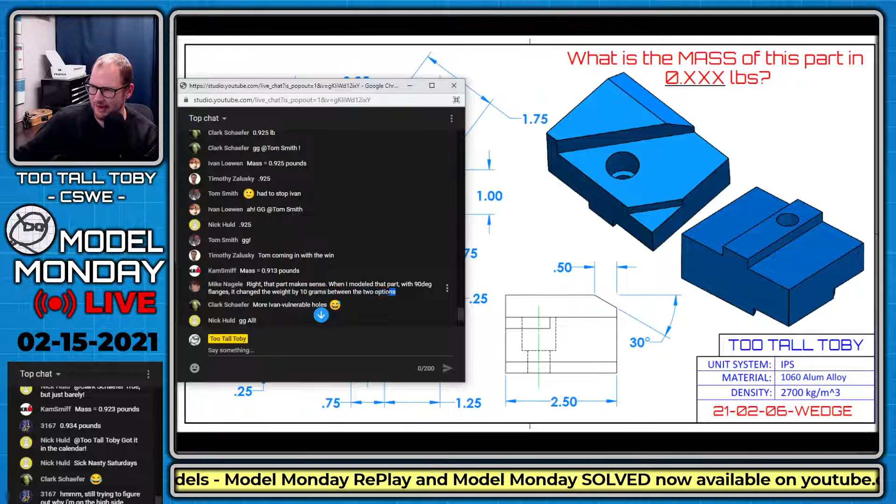When I modeled the part with 90-degree flanges, it changed the weight by 10 grams between the two options. That's interesting, that's what Mike said on that one. I'll have to try that, Mike. Flange position inside, flange position outside, that dimension call out, that usually doesn't change the geometry for me, but 10 grams doesn't seem like it would be... It's weird, it's such a subtle amount. I'll have to look at it and try it, Mike. Great question, I'm sorry I don't have a good answer for you, but I'll bank it in my brain.

All right, here we go. Let's see here, see if anybody came. Okay, there we go, that's where we stopped.

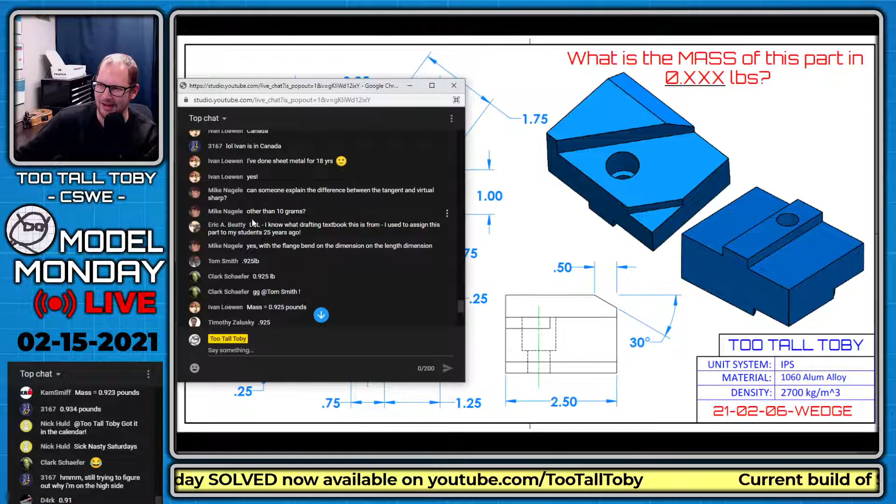Oh, and here we go, Tom Smith, there we go. Here he comes in with the first answer, 0.925. Let's see if Tom Smith got it right. Clark says 0.925 as well. Ivan says 0.925. Tim Z, 0.925. These guys are heavy hitters, and they are all coming in. These answers all came in right one after the other. That's awesome. Tom says, had to stop Ivan. Ivan says, GG Tom. Nick coming in there, 0.925. Nice job, Nick. Let's see here, Tom coming in with the win. Tim Z giving Tom a shout out.

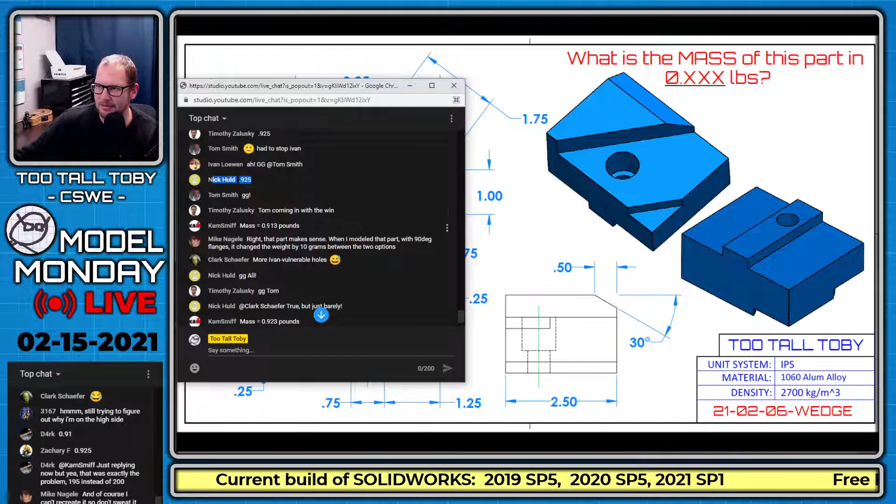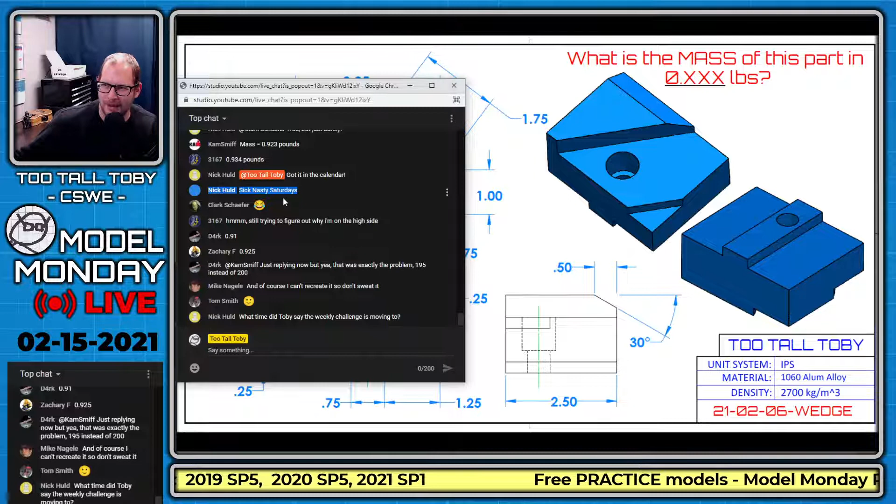Kam coming in with 0.913, trying to mix it up a little bit, saying hey guys, you guys might have missed something. Then Kam looks like he revised his answer here to 0.923. 3167, 0.934, also trying to mix it up. Nick says, got it on the calendar, that is awesome. Sick Nasty Saturdays, yep, love it, that's good. We'll put that one into the hat, that one might make the cut. Let's see here, still trying to figure out the high side. D4rk says 0.91. Zach F, nice job Zach, 0.925. All right.

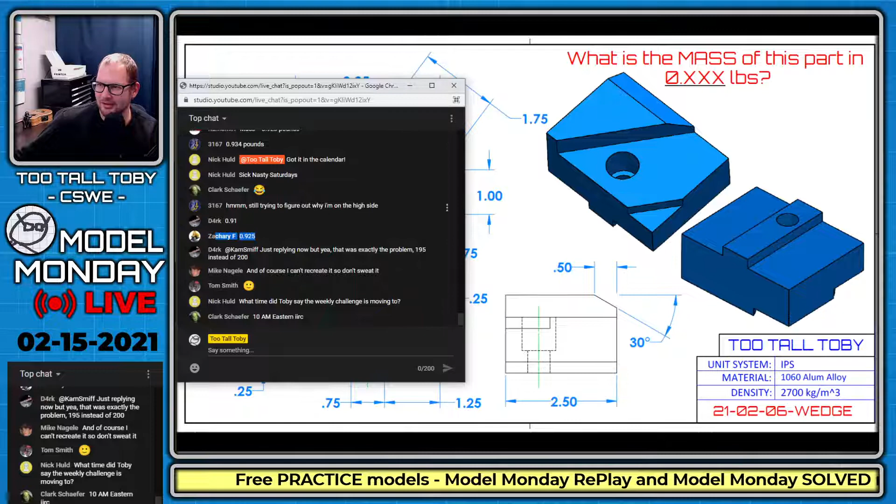Cool. 10 a.m. Eastern IIRC, yes. IIRC, I don't know what that is.

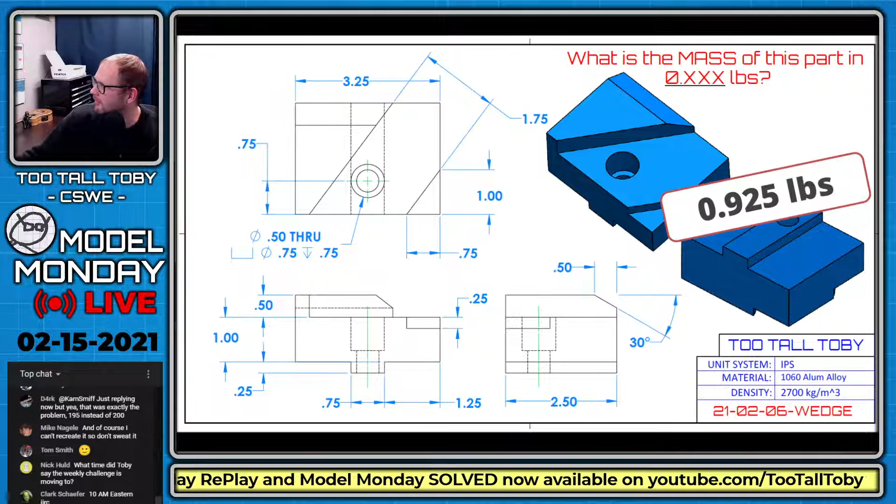What's the correct answer? The correct answer is 0.925. So let me reach out to my PA and ask them to update this website. I'm going to leave your nickname as Dragon Slayer 69, Tom, hope that you are okay with that. If we go to the website here, TooTallToby, we click on the link for Model Monday Live, we can see that we now have two people on the chart. Ivan Lowen, Tom Smith. Congratulations Tom. GG, congratulations to Ivan, very nicely done.